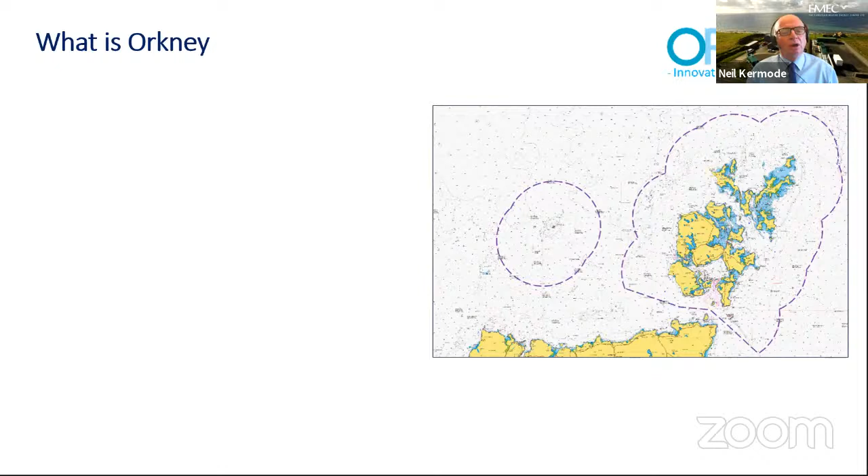And this year we're going to be talking about Orkney's energy revolution. I'm starting off really to pick up the scene before we go into some more detailed aspects. But the first thing really that is worth thinking about is what is Orkney? What do we mean by Orkney? Well, we know geographically what it looks like, and we know where it is. But it is more than just a few spots on a map.

It's 22,000 people spread across the 17 islands, and really we've been at this innovation thing for about 5,000 years or so, and we do have abundant renewable resources. We've also got a lot of hydrocarbon reserves around us, and we have made the most of those over the years. We've always been a maritime crossroads as people have come through these islands from time immemorial, and ideas have passed through just as people have.

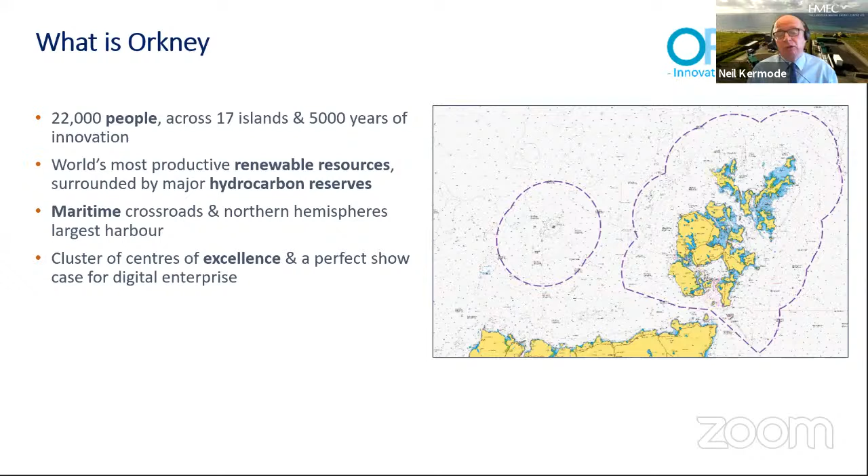And we've also ended up becoming a centre of excellence through a lot of work that's gone on over the years with local businesses, Heriot-Watt University, University of the Highlands and Islands, Orkney College, and a load of other organisations and people who have developed extreme excellence in a number of fields. And we are very capable of showing what can be done on a digital platform. We've become an international destination and renowned for food and drink. And believe it or not, we are the UK's happiest and most sustainable community, according to various measures.

We do also have amazing ecological diversity and environmental quality, and I would argue we're also a community which is very well aware of its impacts and needs. And the colours at the bottom right hand corner are the Sustainable Development Goals developed by the UN, and Orkney maps on very well to a lot of those. Not perfectly, but it does map on very well overall. And the point is that Orkney is really a place where we've discovered the future is actually happening, and it seems to be happening here before a lot of other places.

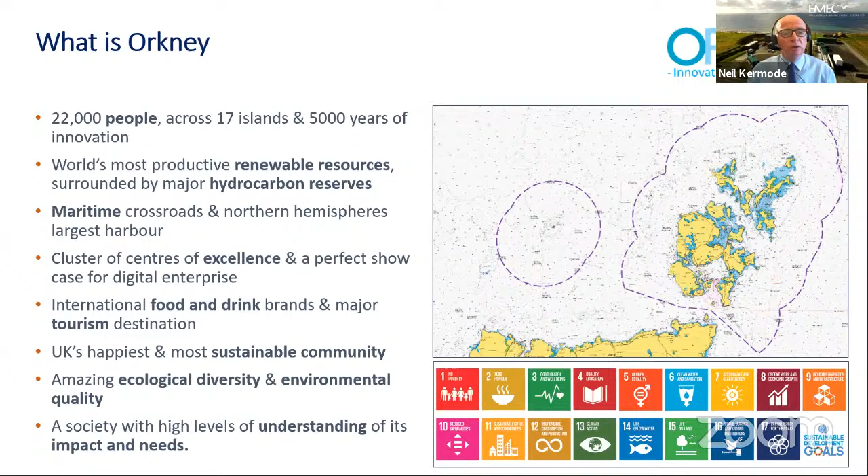Well, quite simply, if you take the UK figures at the bottom of what is being generated and multiply that by 4, you end up with a graph looking like this, showing that there are times when there are renewables which are greater than the energy demand. There are periods when there is renewables that are less than energy demand. And that's what will happen if we put 4 times the amount of renewables onto the network.

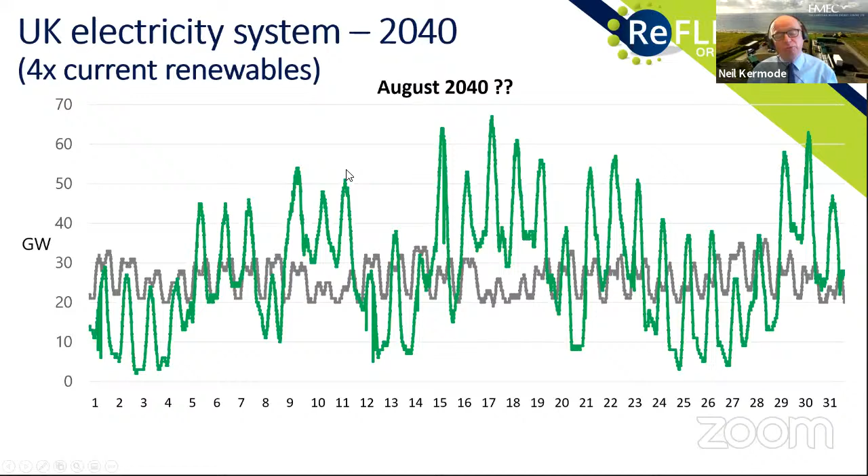So I said we also have a community that understands itself and has got good measurements. Now, some of you who've been to previous science festivals will have seen this graph before, which is a Sankey diagram produced by Gareth's company Aquatera back in 2015 as part of an energy audit undertaken for the Orkney Renewable Energy Forum. And this Sankey diagram shows several things. I'm using this one initially, and then we'll go on to a modern one which has now been produced.

But the point is that the middle column shows the fuels that we use to power our economy. And the top section, ringed in red, shows the amount of electricity we use, and the areas are proportional to the amount of energy used. And you can see going down that we use a small amount of coal, the black horizontal line is LPG, and then there's kerosene, gas oil, etc. Now this was done in 2015, and things move on.

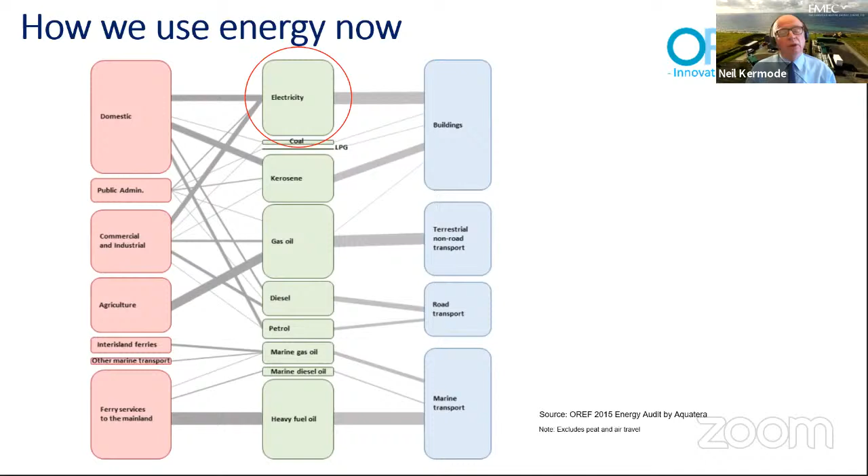And so as part of a project which Gareth is going to talk about later, the Reflex project, this energy audit was redone and a new graphic has been produced, which goes further because this time it splits out on the right hand side in greater detail precisely where we're using fuels for different things. So you can see here electric vehicles, there's a tiny line, diesel cars is quite significant, diesel light goods vehicles, heavy goods vehicles, buses, petrol cars, petrol light goods vehicles and motorcycles.

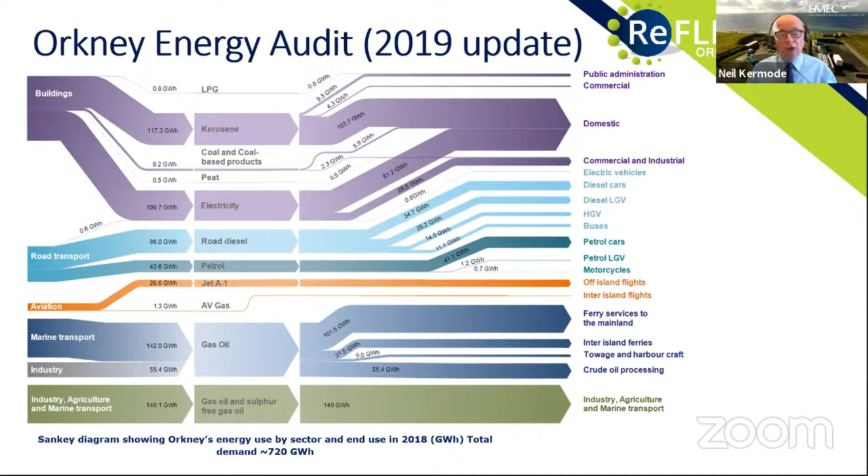So we can see what we're using in transport in much greater detail than we could before. And this is really important because it allows us to track what changes. But this was done before COVID. And now we are also going to see different changes with COVID. We know there is more home working. There's less of a daytime trough, as I referred to it before. The gap between the morning peak and the afternoon peak has now filled in because people are generally at home.

The recession is inevitably going to see less economic activity, and we are also likely to see greater wealth differentiation. So fuel poverty is going to become a greater issue than had been the case. We're seeing less travel. We're probably seeing less actual transport going on, and we're also seeing much greater distances for deliveries, driven by online activity.

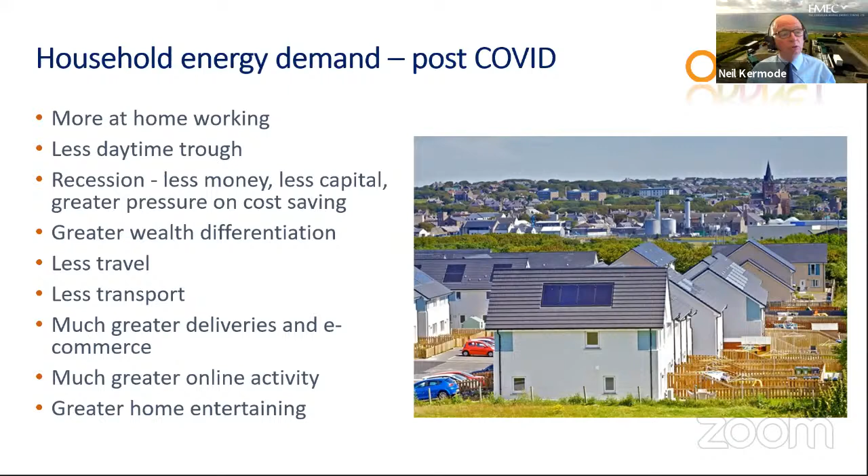And we're also likely to see far more people home entertaining. I've been out to a restaurant once in 6 months. You know, that's a significant change in what is going on. And it's not just household, it's also the industrial and commercial sector.

And we're seeing there'll be less energy used in facilities, buildings and transport due to closed premises, or even due to lower activity in premises. We're also seeing that there'll be less space for certain activities, and there'll be less available room somewhere due to social distancing. Once again, more delivery, more e-commerce, and greater demand in some positive market segments.

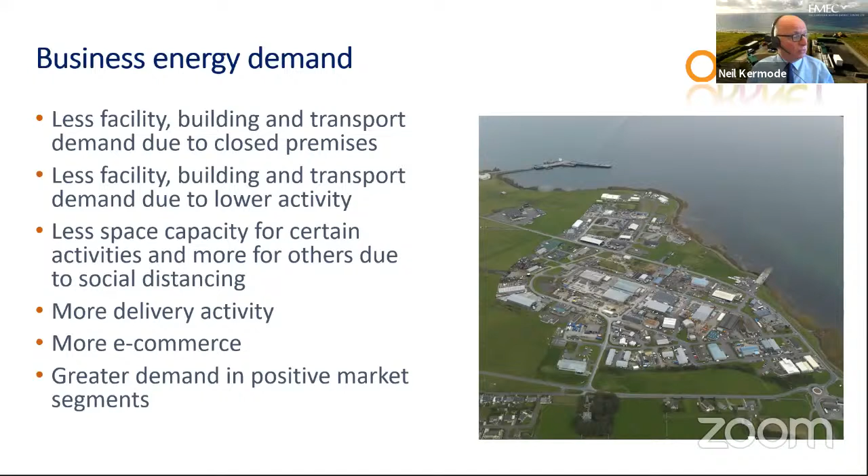So the point is that the analysis we have done does not necessarily give us a perfect example of what a future energy system is going to look like.

So just turning back to this graph, finally, we do know something about what we've got to do with an energy system. And we really know that the middle section here, which runs down from LPG through to gas oil, we are going to have to make all this sustainably. At the moment, it isn't. It's all made out of fossil fuels, and we have to change that. And we are going to have to change that by a number of measures.

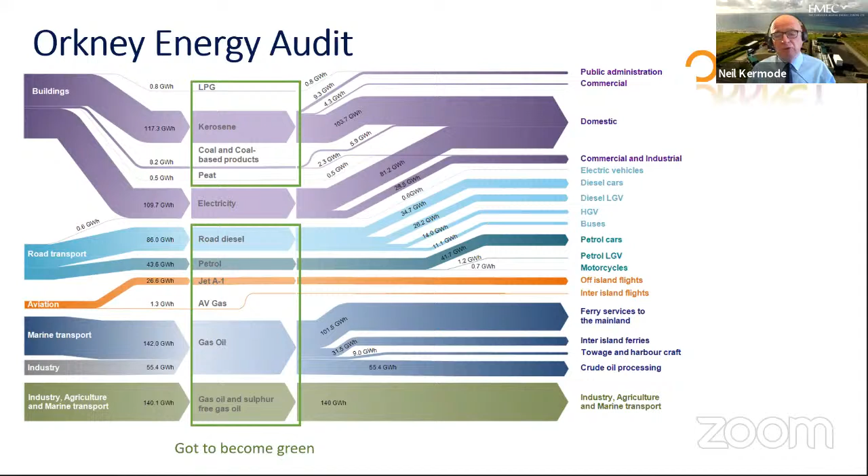In addition, the distribution of the shapes on the right-hand side will also inevitably change. And some of the ways in which we can make those changes will involve things like the use of hydrogen and also batteries. And that's a large part of what the ReFLEX project is doing, and which Gareth will talk about later.

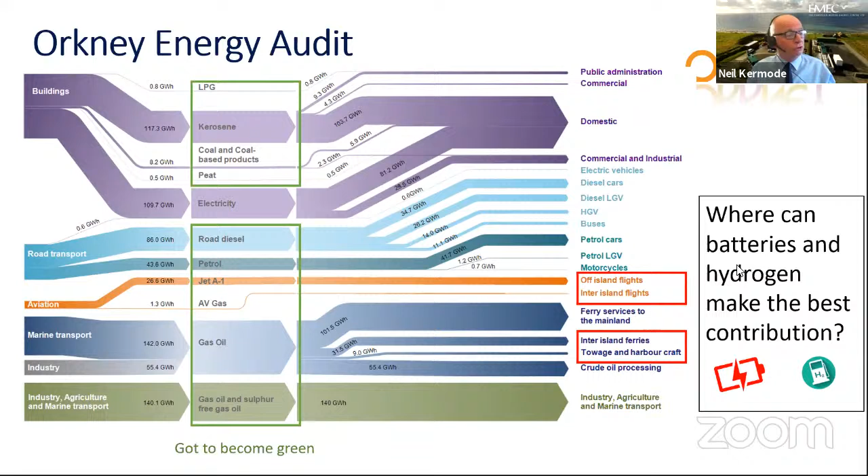So this evening, we're going to look at a couple of particular areas which I think we can go into in greater detail: the upper section, which will be covered by Richy, and the ferries, which will be picked up by James. Both of these colleagues of mine at EMEC are working in particular areas. Richie has now moved abroad, but they are looking in great detail at a number of facets, because we're trying to play our part in finding a way to deliver a new, truly sustainable energy system. So with that, I'm now going to hand over to Richy, who will take up the next section. Richie.

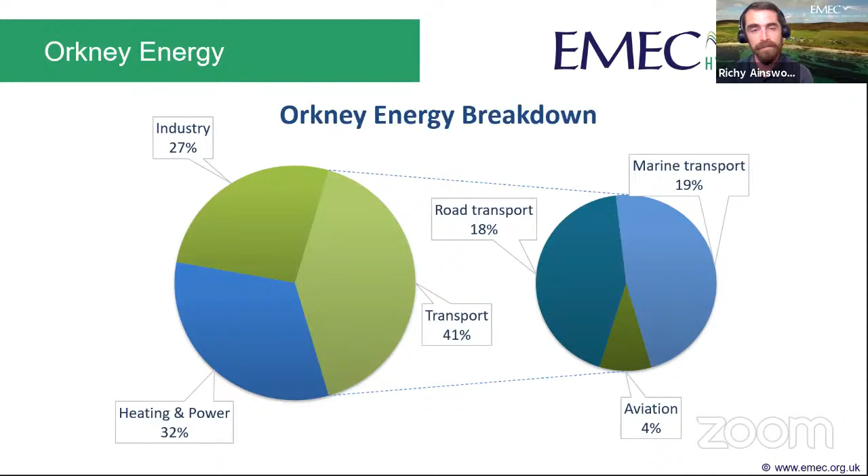If we look at the local use of air transport on the next slide, we can see that we do have a considerable number of passengers coming up to Orkney, and there is an argument that, well, we need to decarbonise air transport. Why don't we just reduce the amount of flights that we have? Do we need to be flying this often? Is it a luxury that maybe in a net zero world we shouldn't be able to so easily afford?

But when you start to think about it, a good portion of those flights that are coming up to Orkney are bringing tourists to visit the local area. That's a huge part of the Orkney economy. But probably more importantly, the smaller flights connecting up our island communities and being able to offer quick and reliable transport is also incredibly important. We also have to have NHS patient transfer services for getting down to the Scottish mainland for treatment in hospitals. So it isn't quite as simple as just reducing the amount of time that we spend in airplanes and the amount of time we spend in the air.

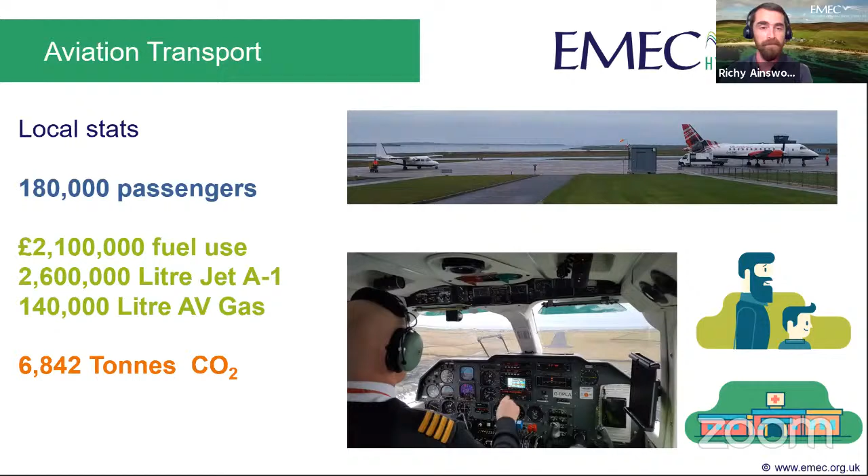We really have to solve this situation and figure out a way we can reduce the CO2 production from air transport. Now, a project we've spent the last 12 months looking heavily into is the HyFLYER project. And we are partnered with a great consortium. We have Intelligent Energy, which are a UK-based manufacturer of fuel cells that are looking at lightweight fuel cell supply for aviation. But the key project partner in the HyFLYER project, if you just jump to the next slide,

is ZeroAvia. Now, they are a US company that initially set up in California with the aircraft that's shown there, which is an M-class Piper aircraft. And what they did was they took out the traditional internal combustion engine run on jet fuel, and they swapped that out with a fully electric drivetrain. And their goal, and why they moved to the UK, was to then change that drivetrain into a hydrogen powered one.

So the aircraft that's shown at the bottom, they came back over to the UK just over a year ago, bought a similar aircraft, carried out the conversion, and then last month they actually conducted a whole range of battery test flights for the full electric drivetrain for this aircraft. We're now at a position where we're trying to phase that into fuel cells, and we will be conducting hybrid tests, hopefully within the month, where we have half battery and half fuel cell operation of the aircraft, with the goal to reach 100% fuel cell hydrogen electric aviation.

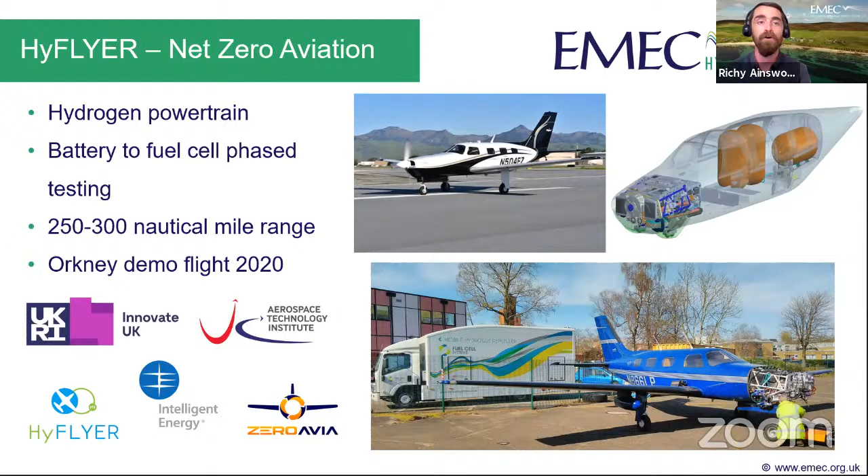The target distance is 250 to 300 nautical miles, and ZeroAvia reckon that would service about 50% of the flights that are taken globally currently. So it's a huge market. It doesn't solve all the problems in aviation, but it's a huge part of it. And a big part for us is the potential of getting this aircraft up to Orkney later in this year and to replicate one of these commercial flights. So flying from Kirkwall to one of the well-serviced destinations on the Scottish mainland and prove that hydrogen in aviation is an option for reaching net zero targets.

If we jump to the next slide, we can see that for EMEC, our key role in the project has been supplying the hydrogen, but we're also supplying the refueling equipment. So how are we going to get that hydrogen into the aircraft? So we went out to tender through public procurement, and we selected the guys down at Fuel Cell Systems, which are based down south. Now, Fuel Cell Systems had previously produced a mobile hydrogen refueling truck, and it's shown in the left-hand side of the bottom picture there.

You can think of it very similar to the hydrogen refueling station that's stationed over at Kirkwall, with a little bit smaller storage and the added benefit that it's on wheels, so we can take it anywhere we want and service any hydrogen project. Now, this was designed and built to the J2601 standard, which is the globally accepted standard for hydrogen refueling in the automotive sector. The reason that we've had to use the automotive standard is the fact that there are no standards available for aviation, and this is a stepping stone to get to the point where we can try and outline what those might look like. It dispenses hydrogen at 350 bar and is capable of holding 55 kilos inside its 500 bar storage, which you can see in the image there.

It's got benefits in the fact that it's compatible with multiple hydrogen sources, so we can charge this truck up with the tube trailers that you'll see driving around Orkney, transporting hydrogen, with MCPs or other bottled hydrogen gas. But we've also looked at producing hydrogen locally and feeding that directly into the truck as well. Another great benefit of this is the fact that it's a 7.5 ton road limited truck. Therefore, you don't need to have a heavy goods vehicle license to drive it. You only need a C1 license, so it makes it a lot easier to be mobile and for our staff to move it around as required.

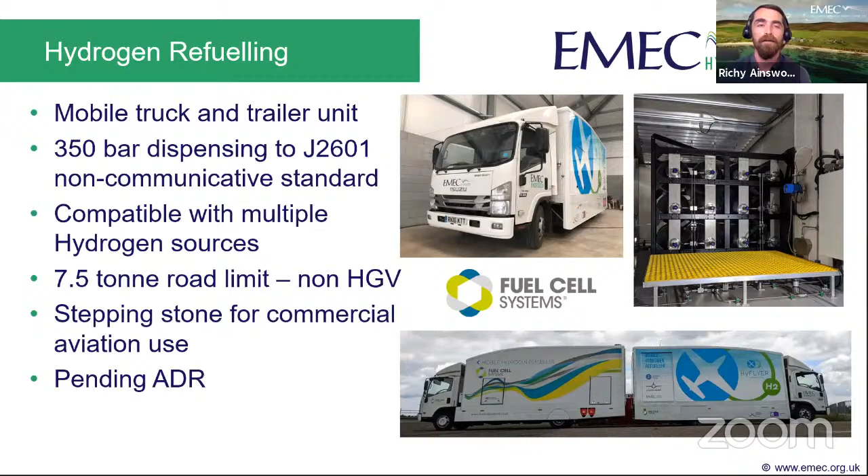We have this in a 10-foot container unit, and it's mobile and it's deployable at different locations. It's modular construction, so we can swap out the components if there's any issues with them, and we have full remote access and monitoring and control of the system.

It only produces a small amount of hydrogen on a daily basis, so the goal is for this to top up the truck as it's used for the project deliverables. I should also note that it's capable of scaling, and the guys at Enapter just now are working on megawatt scale versions of this in containerized solutions. If we just jump to the next slide.

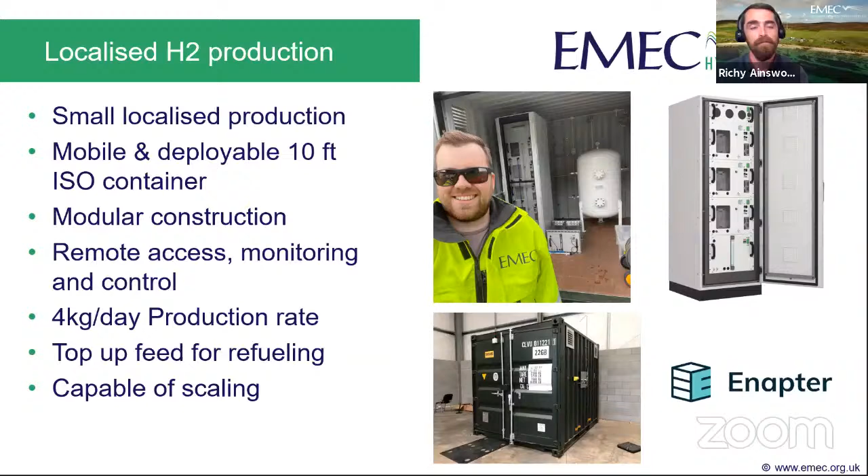So in terms of results from the project, the key thing for us is just learning by doing, trying to demonstrate these things in real life. And we're trying to gain that commercial knowledge of what might be possible with the use of hydrogen in the aviation sector. It's a practical demonstrator first, and we're hoping ZeroAvia are going to achieve a whole range of world firsts, including the largest hydrogen aircraft, the longest commercial scale hydrogen flight, and most importantly, a zero emission hydrogen powertrain that they can offer to industry.

And finally, I'd just like to state that it's been great working with EMEC and being involved in all these different projects. And the growth opportunities that we have are just fantastic. It provides a whole range of options for science and engineering jobs and science and engineering research specifically for Orkney. So one of the biggest opportunities that we're going to have, as James will discuss, is in the maritime sector. So I'll pass over to James now and he can discuss what might be capable of hydrogen there.

Thank you, Richy. If we can skip to the next slide. Yeah, thank you very much.

So hi everyone. As Karen mentioned, I'm at the closing stages now of my industrial PhD, which has been based on hydrogen supply chains. What I'm going to do in this presentation is give a very short introduction to one of my chapters, give you the context behind it, some of the key results, and a summary of the main findings. So if we can first go to the next slide.

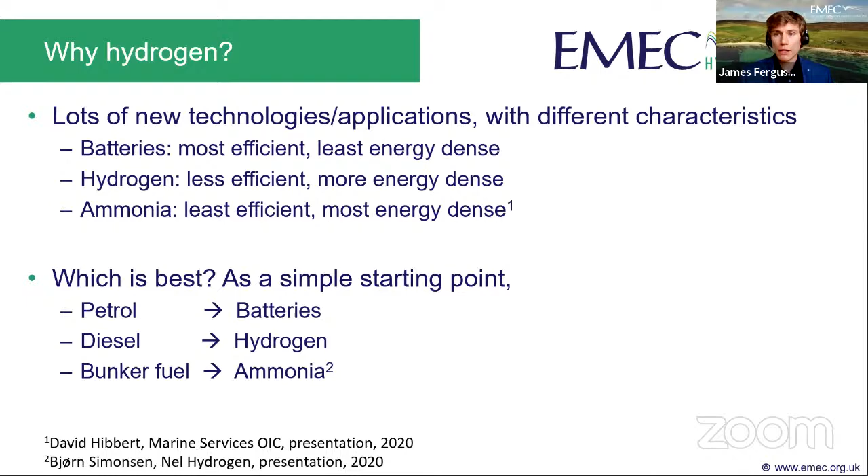As a very simple starting point, at the highest level, you can imagine that if a machine currently runs on petrol, in the future, it can go to batteries. If it currently runs on diesel, in the future, it can go to hydrogen. And if it currently runs on bunker fuel, in the future, it can go to ammonia. So Orkney's ferries are using marine gas oil, which is a bit like diesel. So we're going to be focusing on hydrogen in this presentation. So if we can move to the next slide, please.

There's 101 different ways that you could set up a low carbon ferry network for Orkney. What I've envisioned is this plan shown here. Basically, we've got an electrolyzer near Kirkwall, specifically in Hatston. The electrolyzer is the machine that takes the electricity and water and uses those to make hydrogen. That electrolyzer in Hatston can be powered by a nearby wind farm or a tidal farm near Eday.

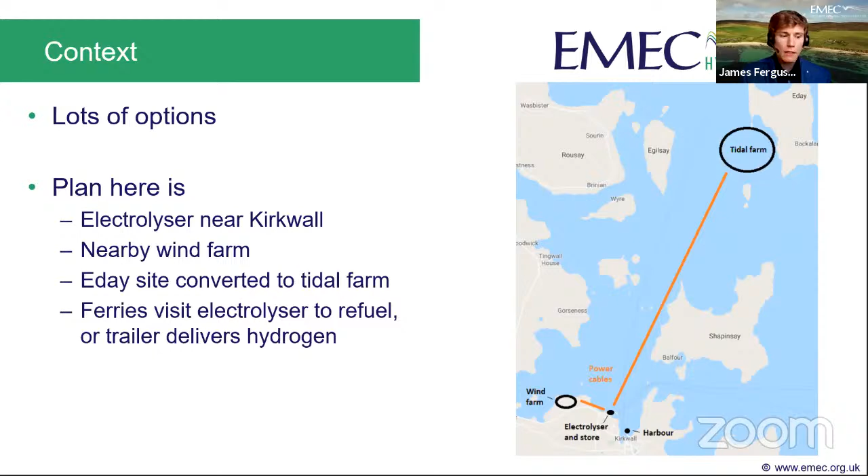And the idea is that ferries can visit the electrolyzer if they're based in Kirkwall, and they can refuel there. Alternatively, if the ferries are based outside of Kirkwall, then a tube trailer can take the hydrogen from the store to, for example, Stromness. So that's the context. We can now move to the next slide.

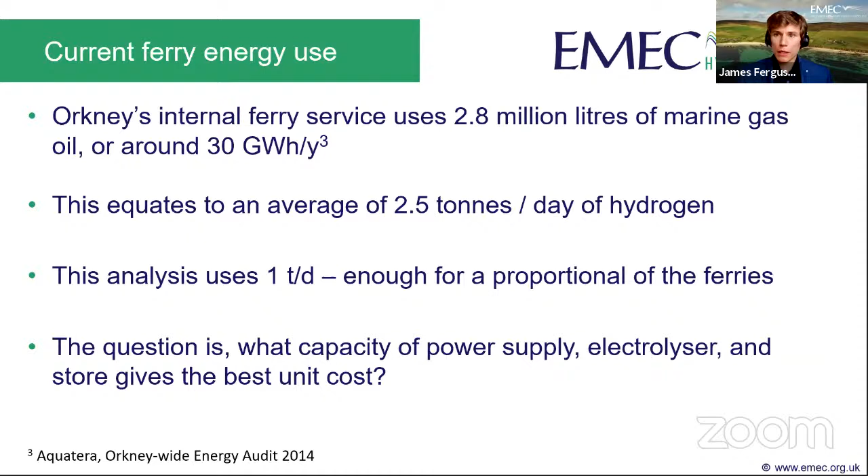So if we're producing fuel and we're delivering energy in the form of fuel, the question is, how much do we need? We know that Orkney's internal ferry service before COVID was using around 2.8 million litres of marine gas oil a year, which equates to around 30 gigawatt hours per year. That is on average the equivalent of 2.5 tonnes per day of hydrogen. For the main body of my analysis, I've used 1 tonne per day. That's not enough for all of them, but it could be a good place to start. So the question is, what capacity of power supply, electrolyzer, and store gives the best unit cost?

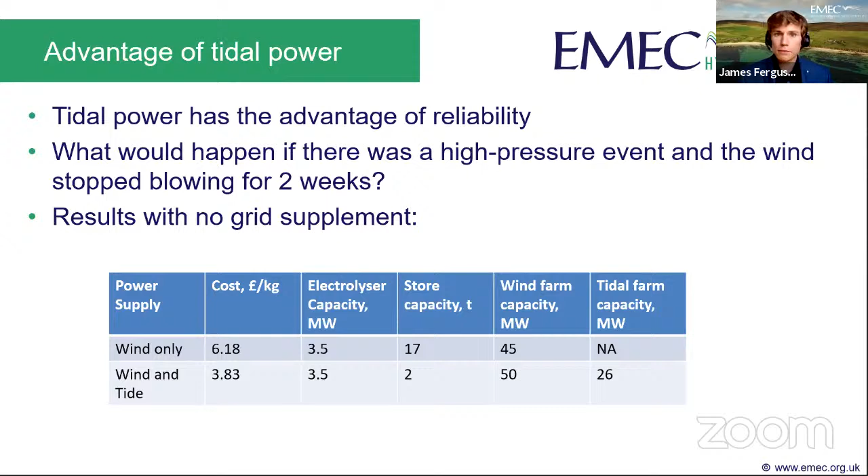To summarize, the best results are obtained for a predominantly wind-powered electrolyzer, which is backed up with tidal and grid power. Depending on the scenario, seasonal variability in demand, and the size of a contingency store, the best costs are between £3.70 and £4.96 per kilogram.

So in terms of fuel costs alone, cost parity is reached with marine gas oil at more like £1.40 to £1.89. So you can see that we've got a bit to go. That's not quite a fair comparison, but it gives an idea that we've still got to bring that cost down because marine gas oil is so cheap. So we're basically seeing that hydrogen is more expensive at the moment, but we can be confident that as these machines get rolled out, the costs will fall.

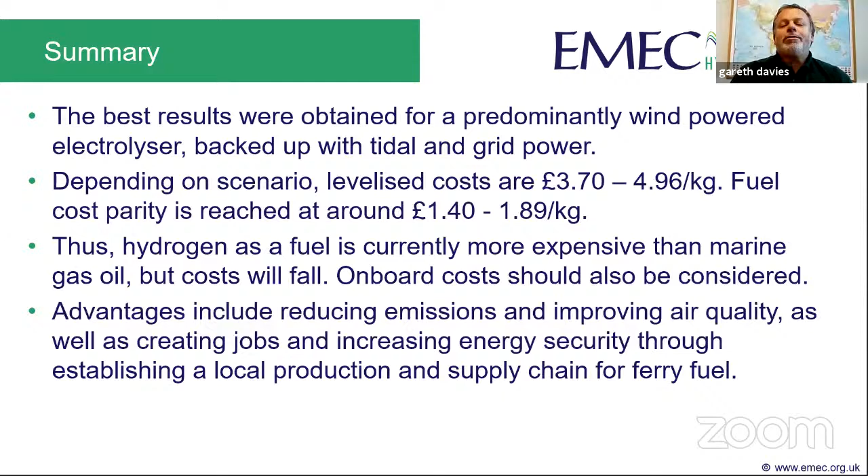So, good evening. Neil showed very effectively how Orkney's got a huge job on its hands, not just to decarbonise electricity, which we've done over the last 20 years, but to now look at decarbonising some of these other fuel systems. And I think Richy and James have really shone a light on the work that's going on, particularly in the aviation and the maritime sectors, to start to look at those issues.

And in parallel with that, the ReFLEX project is really looking at the overall energy system that we have in Orkney and seeing how this can be decarbonised. And I want to talk a little bit about that and put that in the context of perhaps a wider innovation hub idea for Orkney. So if we go to the next slide, please.

So many of you in Orkney have hopefully heard of ReFLEX. Those of you further afield may not have heard about it yet, but basically what ReFLEX is to do at its simplest level is to link all of the renewable generation and the demand that we have in Orkney within a digital control system, and to introduce flexibility, storage and balancing services within that network to allow us to create an integrated energy system.

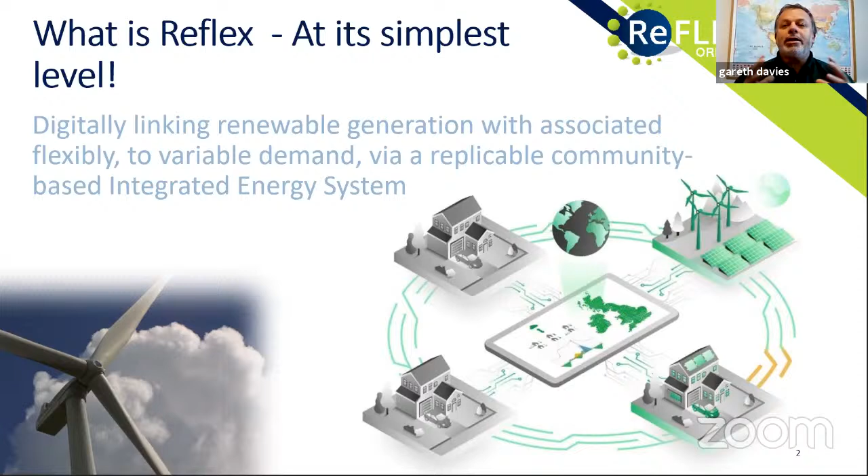And that energy system, if we go to the next slide, is going to consider all three major energy vectors. So it's going to look at electricity, it's going to look at heating and cooling, and it's going to be looking at transport. And so it's very relevant to the things that have been talked about, particularly by Richy and James.

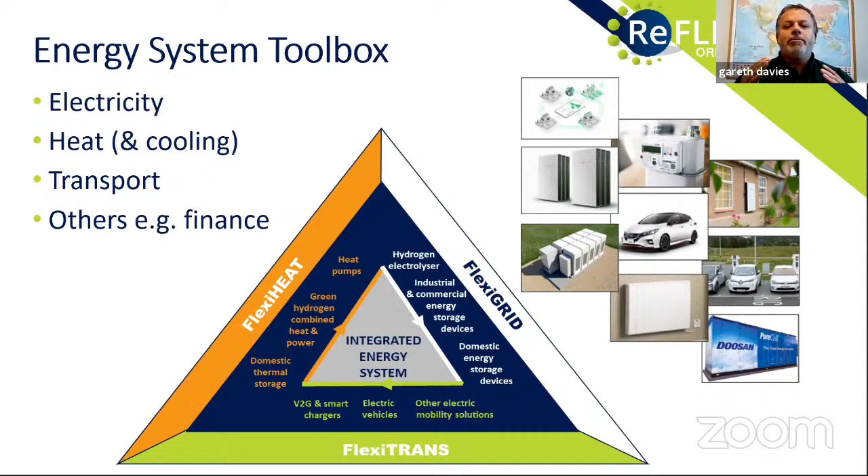And some of the examples of the technology that we may be introducing through that are shown in the pictures here. So it's about looking at batteries, electric vehicles, smart storage systems in homes. It's about looking at hydrogen and the role that hydrogen can play within this energy system. And as I say, it's across these three vectors of grid, transport, and heat. Go to the next slide, please.

So the program is over 3 years, and we're just over a year into it now. It's fair to say that the COVID events have been a challenge for us, but we're moving towards a launch later on this year. And basically what we've done within this ReFLEX program is looked at that pattern that Neil showed very effectively about how the demand in the domestic and business sense for electricity dips at different times of the day and peaks at other times of the day.

And working with Solo Energy, who've got a control system, they're going to be introducing batteries which allow us to modulate and load shift that load between these systems. We've also been looking with partners, a company called Fleet Drive, one of the largest suppliers of electric vehicles in the UK, to be able to introduce electric vehicles on a lease basis into Orkney, as well as being able to purchase them, and also working with Co-Wheels on a car club scheme so that you can actually get access to electric vehicles through that kind of mechanism.

On the heat side, we're working with hydrogen and looking at how hydrogen can be used to support buildings as well as the ferries that James talked about, and also looking at how hydrogen might be able to be used for some of the more intense transport and mobility uses around heavy goods vehicles, buses, and agricultural vehicles.

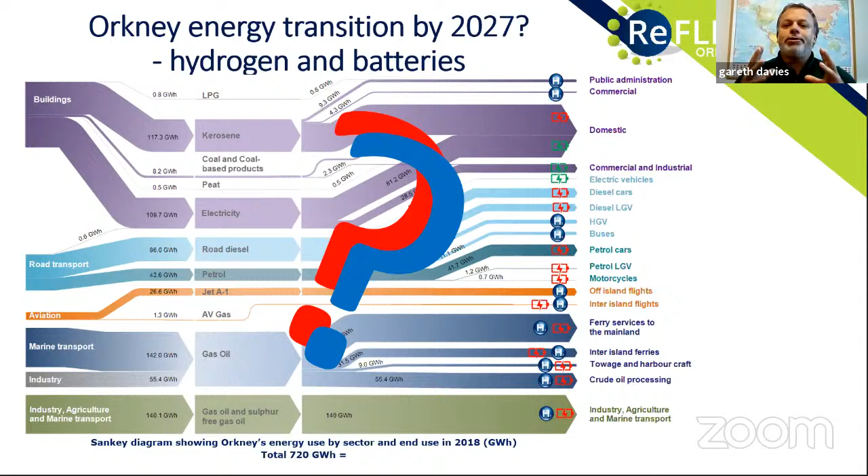So Neil posed this question earlier on about how are we going to move this energy transition from hydrocarbons to something that's decarbonized. And I think we started to see from what Richy and James showed how hydrogen can play a role, and there's also other areas where batteries and electrical power are going to be playing a role. Now, it's too early to say in exactly each case which one is going to be best, and in many areas it's probably going to be a combination of those. But Orkney is really at the heart of what's happening in that regard. Next slide.

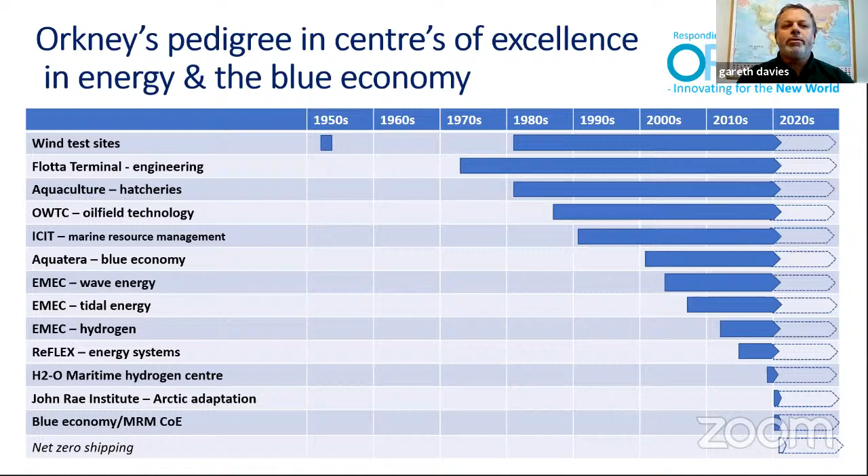So, as well as having Reflex as an initiative which kind of commercializes energy services, we're also looking to tie together all of these things we've talked about as an innovation hub. Next slide, please. And as Neil said, Orkney has been at the forefront of centres of excellence for many years. There's a list here of the areas where Orkney has developed centres of excellence going back even to the 50s, really, when wind testing started. There was a period in the 60s and 70s before the Flotta terminal and the energy side kicked off. But there's a lot of activities that have gone on over the years, and there's a lot more that are coming at the present time. Next slide.

And so one question that we get asked is, well, why Orkney and how is it happening in Orkney? How does a community of 22,000 people support this number of centres of excellence? And part of it is political, part of it's geographical, part of it's about the spirit of Orkney and the opportunities that the resources in Orkney give us. And it's really taking all of those assets and putting them together in a package. And perhaps because we're an archipelago of islands, we're not just one place. We actually have a lot of the dynamics that affect much larger land masses and more complex systems.

But what we see is at the scale that Orkney operates, we can accelerate transformation at an affordable scale. We can road test things which are going to be rolled out more widely. And this idea of Orkney being a living laboratory is something that we've proven again and again, not only helps the technology and innovation, but it helps the community by creating jobs as well.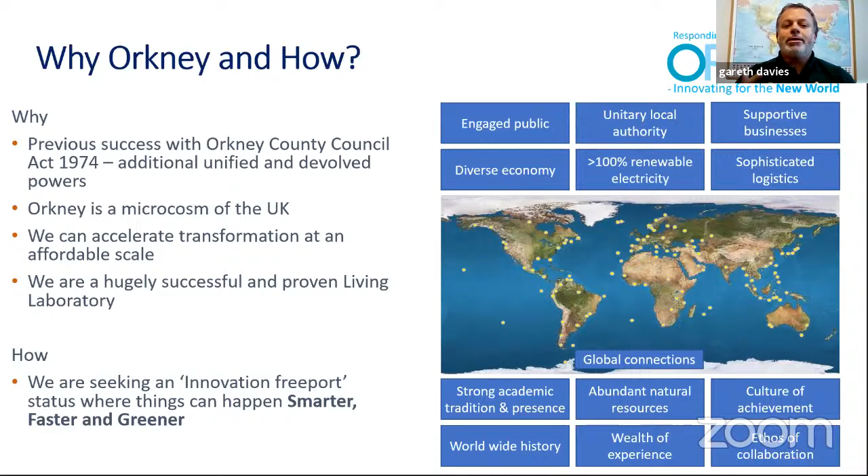So basically what we're hoping to do, or helping to do, is make things happen smarter, faster, and greener. Next slide. So very recently, this idea has been put together in the idea of what's called an innovation Freeport. And the current UK government is very interested in the idea of Freeport development.

And translating that into an Orkney sense, we see three themes: one around energy, one around transport, both of which we've talked about, and digital enterprise, which is going to be crucially important across a whole range of economic activities. And so this economic Freeport would give us the recognition that we are a centre of excellence in these areas. It would give us the mandate to lead innovation in these areas, and the regulatory and fiscal flexibility to explore new solutions, which aren't following the old ways, but are actually looking at new ways of developing these things. Next slide.

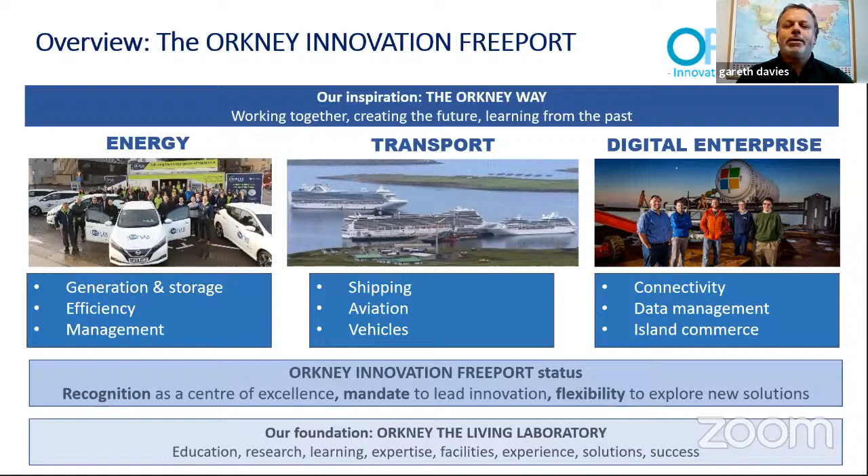And an example of that in the hydrogen space, taking the work that you've heard, particularly from James, further forward, is could we use our ferries, our work boats and our fishing boats effectively as test beds, where some of these new propulsion systems could be fitted effectively as Lego blocks. So the boats are designed specifically so the propulsion system can be taken in and out very easily. It means we can be road testing new technologies and see how they work at an early demonstration stage, and then that can be rolled out at a more commercial level afterwards. That's an example of the kind of innovation hub being put into action. Next slide.

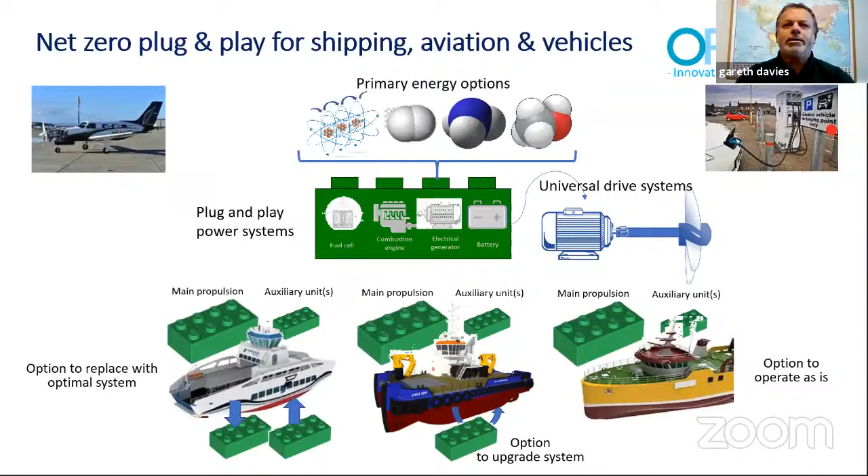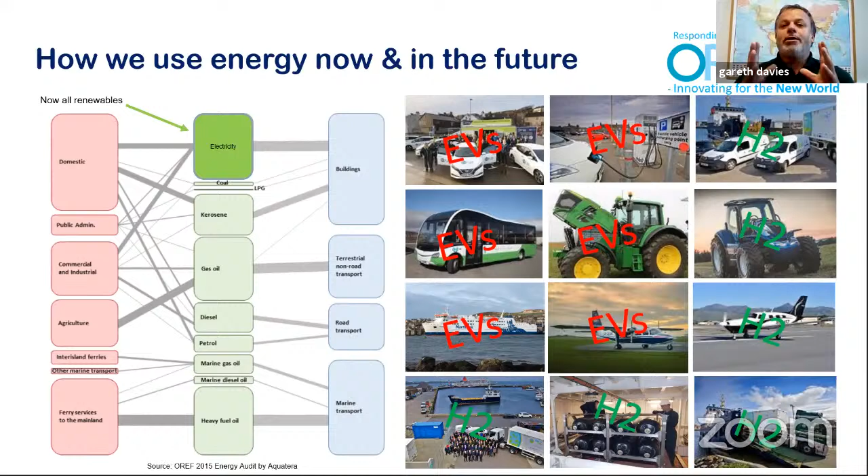So if we think then about how this plays into our energy system, this is back to the Sankey diagram that Neil showed earlier. Click again, please. So we've already transferred our electricity into renewables, and we need to do that other part of the stack, the other 85%. Next slide, please. And that's going to be a combination, and transport's going to be a big part of that. Next slide. And that's going to involve a combination of batteries and hydrogen. And as I say, we don't know exactly how that's going to play out, but it is going to be a combination of those things. And Orkney is already, as you see, making progress in these areas, and we're going to make more and more progress going forward. Last slide.

So why are we doing this? We're doing it because we have to decarbonize Orkney. And the reason we have to decarbonize Orkney is that we need to decarbonize the world, and we can't just do that magically. We have to have communities which can be lighthouse communities that can show a way for other people to follow. Now, Orkney's been on that path for a long time. It means that instead of adopting the UK target of 2050 or the Scottish target of 2045, we need to go for something much earlier. And at the moment, our working target is that we need to decarbonize Orkney by 2030. And so all of these things that you've been seeing today need to be applied early to get us there smarter and greener to the world that we want to have.

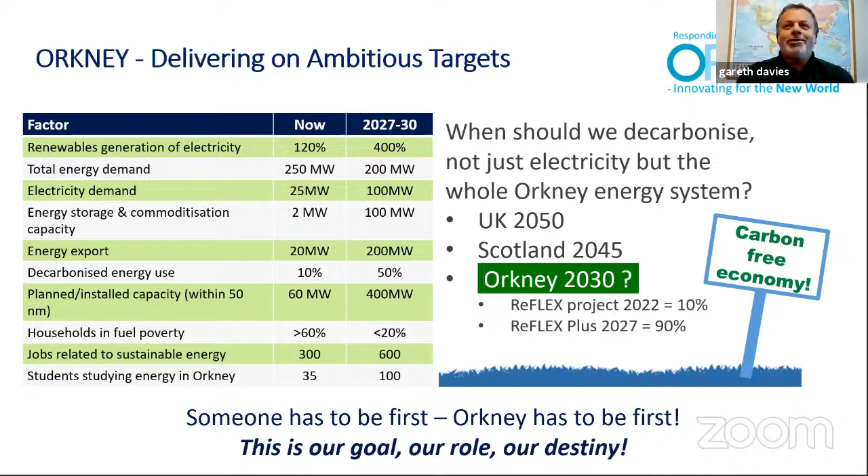So that's the end of my bit of the presentation. I'd now like to hand over to Karen, who I think is going to lead us through some Q&A. Thank you very much, Gareth, and to Neil, Richie and James for some really interesting presentations. It's just very exciting to see developments which are happening on our doorstep. So I'll just start off the Q&A session.

Following on from Gareth, we have a question for you, which comes from Richard Oakley. And it's, what developments in battery technology do you envisage as being the most helpful? Yes, so that has brought up the topic that we haven't discussed today, but clearly, alongside hydrogen, there's a huge amount of investment going into batteries. I'm not an expert in it, but my awareness of it is that there's chemistry that's being looked at. So lithium ion is our classic battery, or lead acid used to be our battery. So people are looking at the chemistry of batteries, but they're also looking at the production techniques, the intelligence that batteries have themselves. Batteries are now produced with chips inside them to give feedback about the state of the chemistry.

These can allow them to be run much more effectively, because instead of just assuming it's at a certain temperature or in a certain state, you actually get data on it. So things like chemistry, production, and smart batteries are all making them more effective. And the cost is just collapsing at the moment. Particularly the Chinese, the amount of batteries they're producing, the quality is increasing, the price is coming down. That's really influencing the whole market.